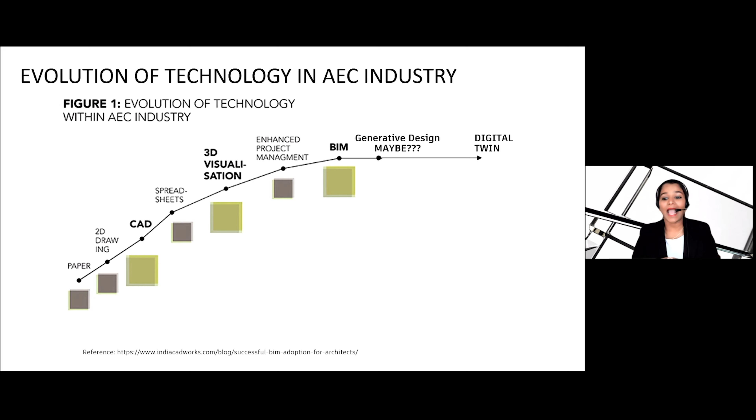This generative design for multifamily housing is a humble effort put together with our industrial knowledge and coding knowledge with a lot of enthusiasm. The objective of today's presentation is to introduce generative design in the multifamily field. There are a few projects done in this realm already, but either those are inaccessible or made into a software itself. This makes it difficult either for purchasing, mastering, or even knowing about it. Having said that, our objective for today's presentation is to identify the workflow to produce multifamily design options, implement similar automation processes to minimize design downtime, discover innovative design solutions for custom site conditions.

The goals for today are to explore design options for custom site, building, and units, to understand how generative technology is used in multifamily design, and to understand the pros and cons of using generative design itself.

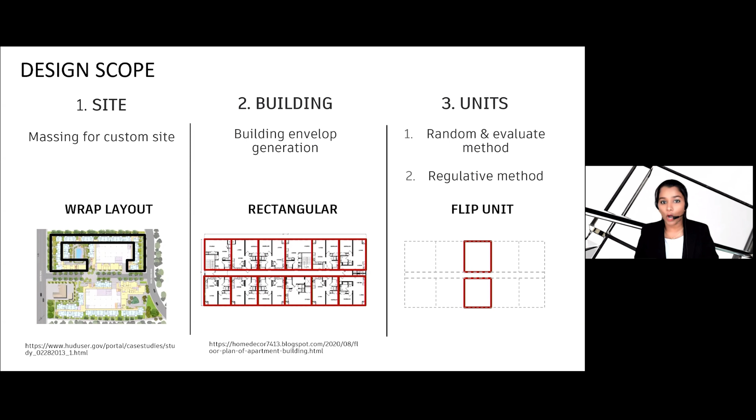Firstly, the design scope and the basics of generative design. We are going to see the idea behind generating options for custom sites, then moving on to the building envelope, and finally to the units. Units being the small yet major factor of multifamily, we are proposing two ideas of how units can be generated: random method and regulative method. There are obviously many types of construction, but the scope of this project is limited to a wrap layout, rectangular building, and a flip unit. The project can be expanded or customized to podium, slab, walk-up, and tower construction.

Primarily, the basics of generative design. Generative design is like a mathematical formula where you will have an input, formula, and output, except we'll have n number of outputs for all possible iterations. Generative design also has a way of filtering it, where thousands of options are proportionately reduced to 10s and 20s as per our requirement, after which the designer will be able to choose the best ones.

Here, stage one is the input stage. The initial idea will be given as an input, which can either be from Revit or it can be manual, or in some cases it can be both. The second stage is going to be the programming stage. The design restrictions are formulated in Dynamo in the form of algorithms and codes.

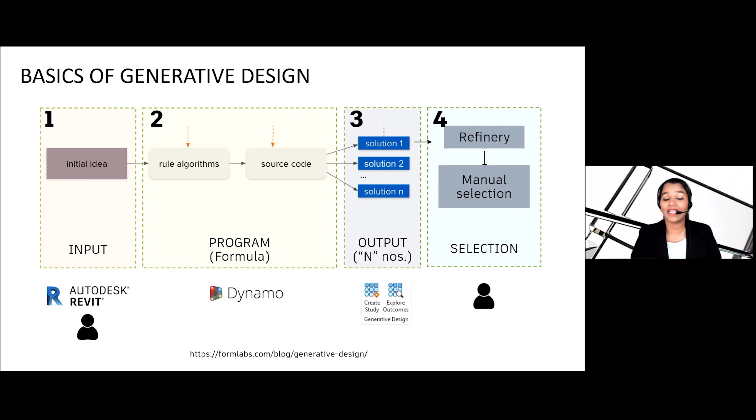Stage three is going to be the output stage. Here, n number of solutions are formed using generative design, where it can be filtered as well. Stage four is going to be the selection process. However many options the generative design can generate, the manual selection of design is definitely required by the designer.

Moving on to site solution. So we are doing an extrude and evaluate method. The design scope of this site is limited to wrap layout. The wrap is typically seen in urban areas where the site is either small or more expensive. This type is characterized by buildings being arranged along the property line, like it's being fenced by buildings, sometimes divided by walkways, roads, or breezeways. It usually wraps the parking structure or an open area like a courtyard.

Site generation is done based on a series of setbacks and extrusions. Then roads are allocated, followed by splitting the building based on custom requirements. Finally, the efficient and feasible output is chosen.

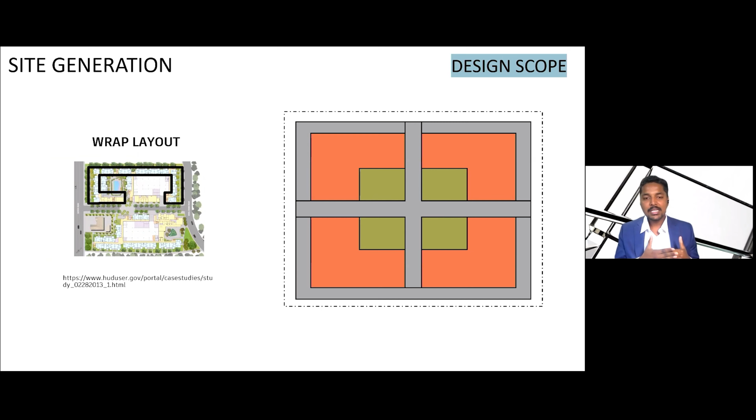These are the stages of how the graph is generated. Firstly, the input that the user provides. Second will be the program in the form of algorithm and code using the user inputs. Following is the geometry outputs generated out of the algorithm, then options in generative design, and finally the selection of the best solution.

So this is a visual representation of the stages of site generation. The first stage is input. Input in this case will be both Revit and manual input. The site property line is input in the form of a line drawing, which is from Revit. Then according to the city or county rules, the offset of walkways, landscape, setback, road, building width, and height are given as input.

Stage 2A is the offset. Based on the input, we can see a set of offsets are generated, which also includes the building width. Stage 2B would be the custom split. The building footprint that's generated is split. Here, for the sake of this project alone, a random method is used to create the split. Like I said, it can be customized according to county, city, and also the designer's need.

In the next stage, 2C, the split is incorporated with the building footprint, forming the required number of buildings. Then in stage 3, the buildings formed are given heights based on the supplied height input. At the fourth stage, n number of options are generated when the program is fed into the generative design software.

This is the actual graph in Dynamo. I mean to say, this is how we coded it. I've blown up the site inputs and the random split parameter to have an idea of what is happening within our script. Here the inputs are site property line, site setback, internal road width, number of roads, and building width. On the bottom left is the custom split parameter, which can be customized to the user's need as mentioned before. In this case, we have given random inputs.

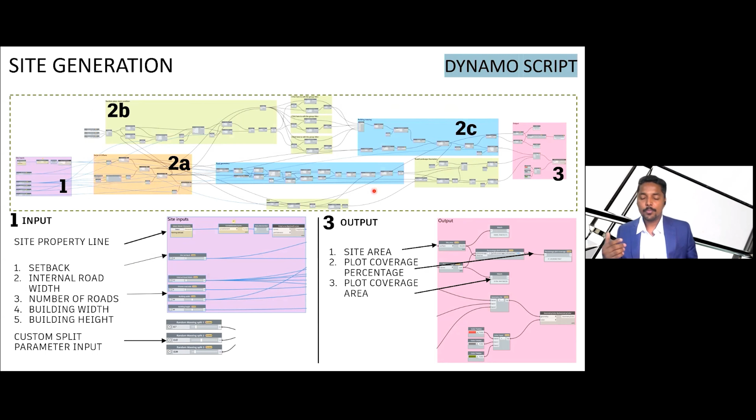The output of this graph along with the site massing will generate site area and plot coverage percentage, which is shown on the bottom right graph. Comparing the blown up graph and also the overall graph, we could clearly see that the script starts with the inputs that the user will be providing. Following that will be our script, and towards the end are the output nodes.

This graph over here shows the actual interface of the generative design. Over here towards the left shows n number of site options that have been generated from the Dynamo script that we showed before. If we move down this list, we have n number of options listed. The right side highlights one of the generated options along with the plot coverage, percentage plot coverage, site area, and also the split condition.

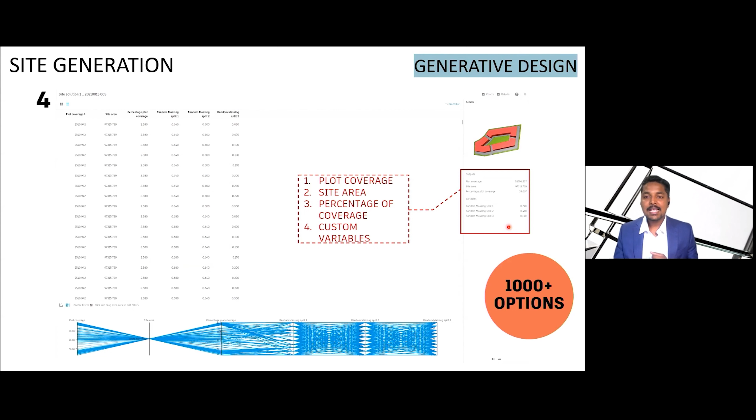The 1000 plus site options generated in this case are filtered based on the percentage of plot coverage. Here we have 100 plus options with just 35% of plot coverage. We can still move on and keep filtering the graph to fewer options to choose the best out of it.

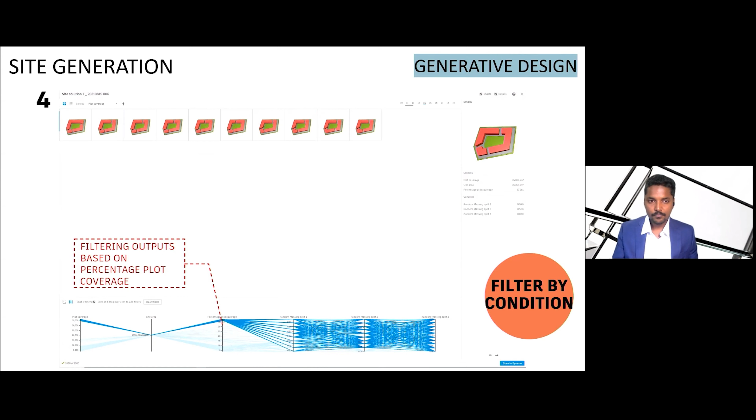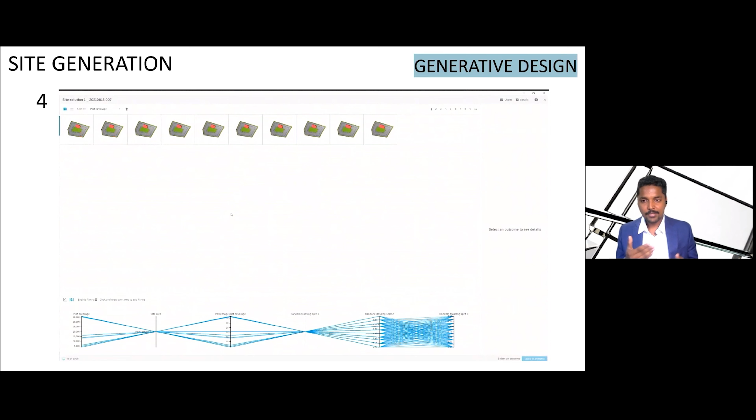Here, the first window is the input screen, after which the generative design software is producing 1000 plus options as per our requirements, which we can visualize on the bottom blue graph that's being updated as we look at it. We can also see on the top right where the numbers are increasing. That's the pages. Generative design is visually showing us 10 options in each page. We'll get to see it finish for a second.

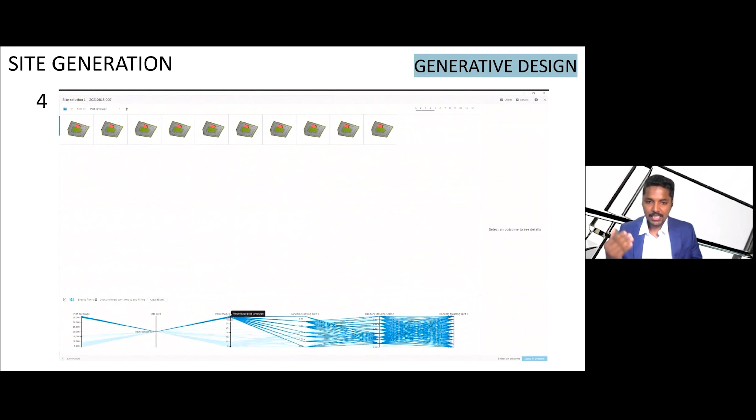Okay, I'm now filtering the options based on site area and plot coverage. This filtering will yield a handful of options from 1000 options. From here, the designer can choose according to the requirements. Now that the site mass is generated, this will form the basis for the building generation and unit generation.

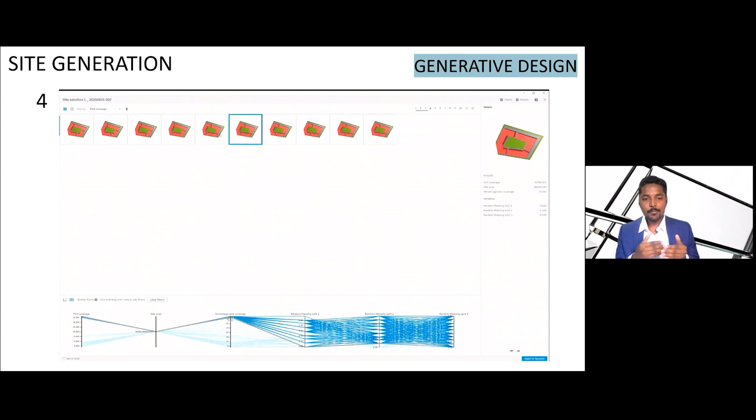Over to Ramya. The next part of this presentation is going to be the building generation. Now that we have achieved site output, the masses after the split can be used to generate the building itself. Building generation is going to be simple. Here we input the shape, say rectangular, L-shaped, or any custom shape. To remind what we discussed earlier, the building design scope is limited to a rectangular building. There's going to be a hallway. Along the hallway, on either side of the corridor, units and stairwells will be arranged.

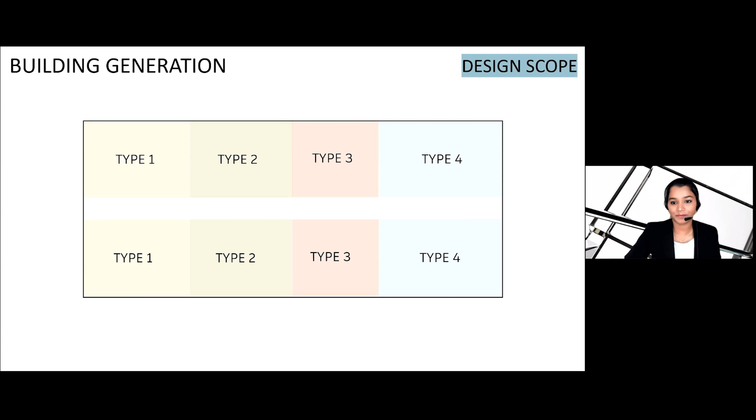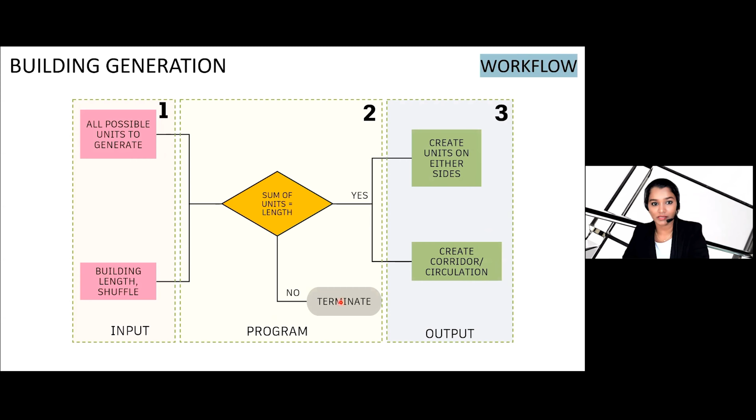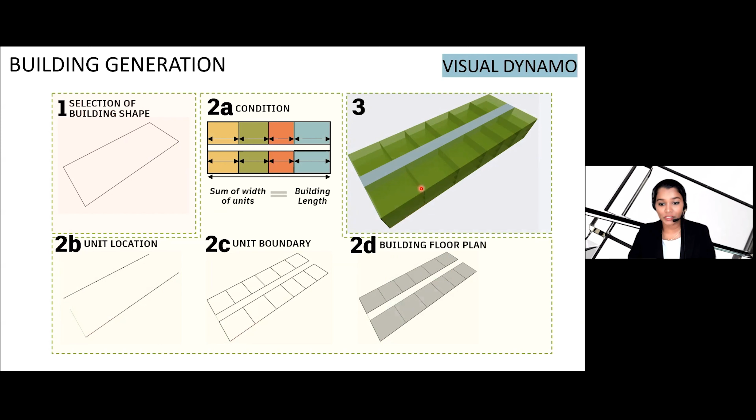Stage 4 produces the unit boundaries within the building boundary according to the number of unit requirements that we supply. In stage 5, Dynamo creates a surface for the unit floor plan. Then this is extruded and multiplied to the required number of floors vertically. Building generation in Dynamo will look like this. Here I have blown up the inputs for us to take a look at and understand what's happening in Dynamo.

The inputs here are all unit sizes. We are considering 1 and 2 bedroom units for this project. The range of unit widths will be from 24 to 38 in increments of 2, like 24, 26, 28, 30, up to 38. Other inputs are the number of units required in the corridor, building length and width. The graph is then fed into the generative design software to create the most optimized option.

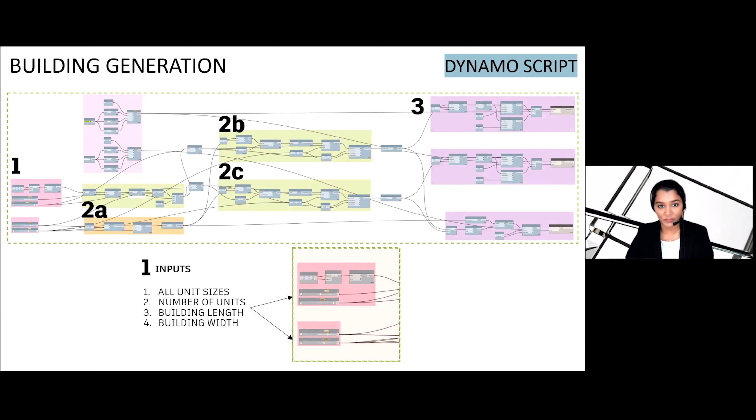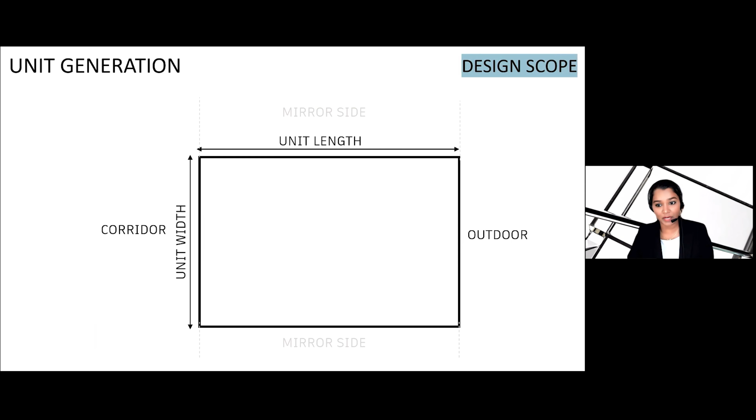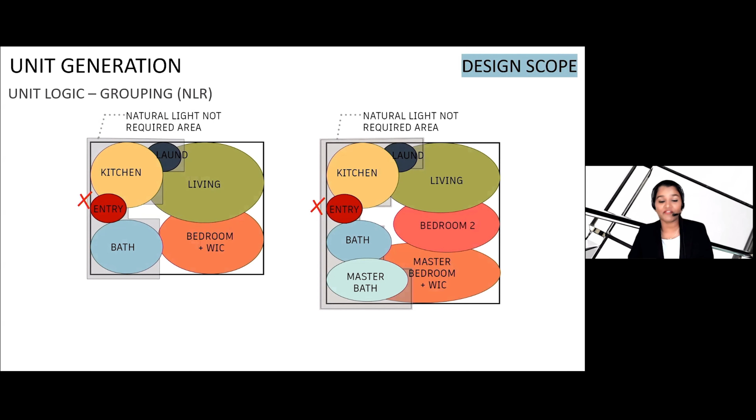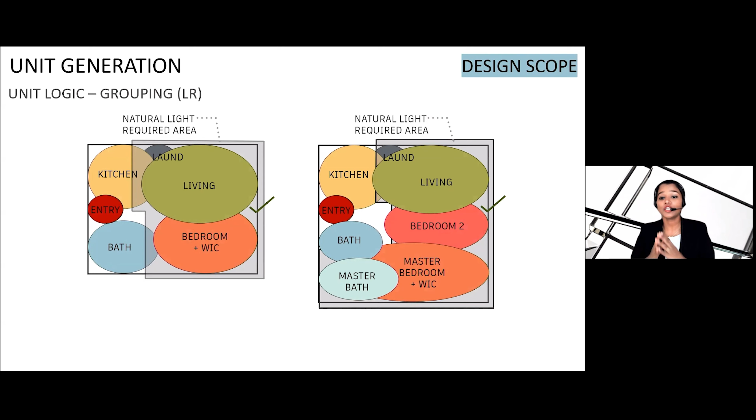The logic behind placing rooms within the units follows a grouping pattern: the natural light not required area and the natural light required area. These are the two grouping categories. Rooms like entry, bath, kitchen, laundry, pantry, coat closet, linen, and walk-in closet can be placed on the walls which do not have natural ventilation. But rooms like living and bedroom, called the habitable rooms, by law require natural ventilation. The grouping helps us zone these rooms and hence narrow the design much more.

The first method is the random and evaluate method. This method will generate rectangles within the boundary, and the locations of the rectangles are evaluated with each other. They are given design scores based on the evaluation.

So like you see, the inputs in this case are going to be the length and width of all the rooms and the unit width itself. If the inputs satisfy the condition, then rectangles are created on the non-light required zone and light required zone. The rectangles thus created are evaluated against each other in Dynamo itself.

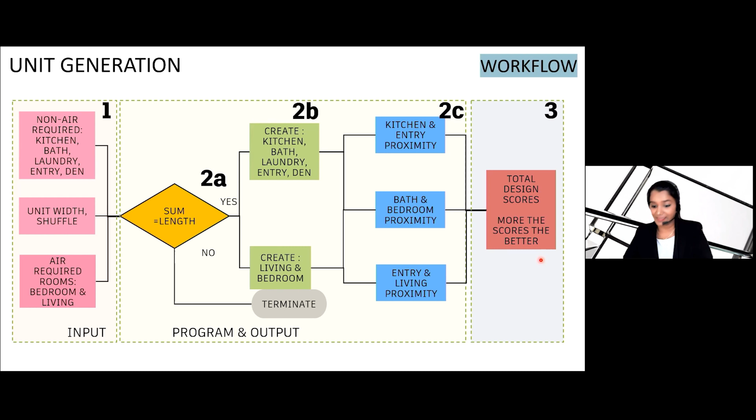The evaluations are assigned a score based on the output. The sum of these scores is called the design score, which is an output itself. The higher the design score, the better the design is. Here we are discussing the conditions that the inputs must satisfy in order to form rooms within the unit.

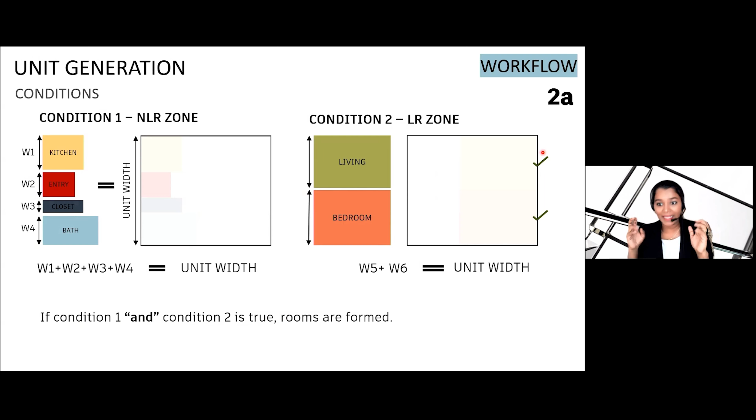Condition 1 is for the non-light required zone. Here, the sum of the width of the rooms should be equal to the unit width. Similarly, condition 2 is for light required rooms. Here, the sum of the width of the light required rooms should be equal to the unit width. All the rooms will be produced only if both conditions are satisfied, otherwise it will be terminated.

This is how the unit generation will visually look. Inputs are given in the first stage. These inputs are the dimensions of the rooms and unit width. Like we discussed earlier, it must satisfy condition 1 and condition 2 in order to create the unit boundary. The edges of the unit boundary are then selected and the origin points for the rooms are created.

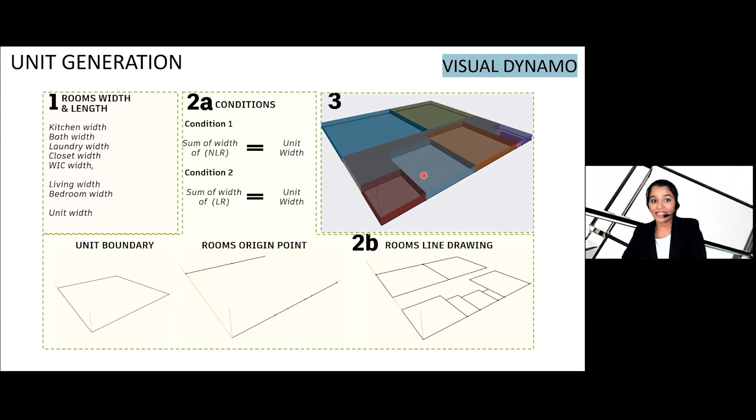With the origin points, rectangles are created within the unit boundary denoting their respective rooms. And then it is extruded to form the whole unit itself. The unit geometry creation will look like this in Dynamo. I mean to say, this is how we coded it. I have zoomed in on the input for the unit generation to understand what is happening there.

Like we see, there's a slider for the width of the kitchen, bath, entry. This also gives a way to toggle between rooms. For example, the laundry room can be toggled. If you want a laundry room, you can have a laundry room, or else you can just avoid it.

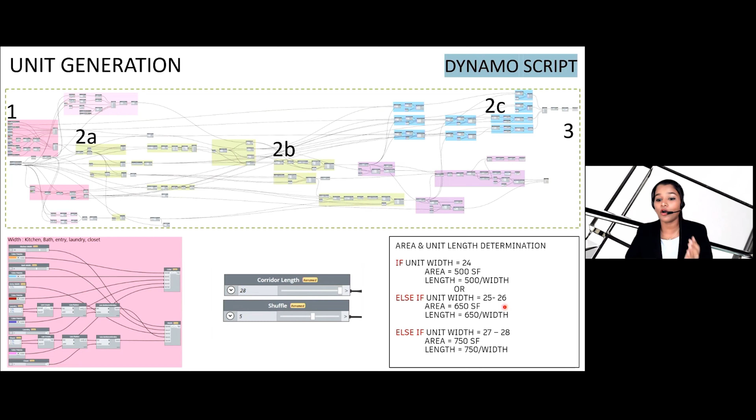We also have an extra condition here where the unit width will determine the area and length of the whole unit. For example, if the unit width is 24, then the area of one bedroom will be 500 square feet. Similarly, if the unit width is between 25 to 26, then the area of these units will only fall under the 650 square foot range.

The interface that you are seeing here is the generative design software. Here the graph, random and evaluate, is fed and 26 foot is given as the unit input. Towards the left corner, one can see 1280 options generated. Generative design uses the cross product method here, which iterates every single input against each other, producing 1000 plus options.

In this animation, one can see all the options are arranged according to design score. On the right, one can see one of the 1280 options generated along with its input. The graph below indicates all the options in the form of blue lines. You can see the animation on the right where it shows all the options and it looks nice. Some cases have laundry, the other cases do not have laundry based on the toggles.

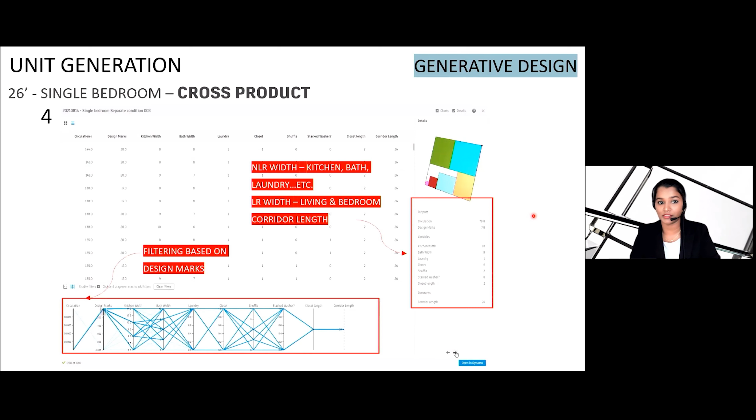Here, this example shows the unit generated for 28 foot unit width. Unlike the previous method, here generative design uses the optimize method to evaluate the graph. Here, the software optimizes by maximizing the design score, hence producing only 48 options.

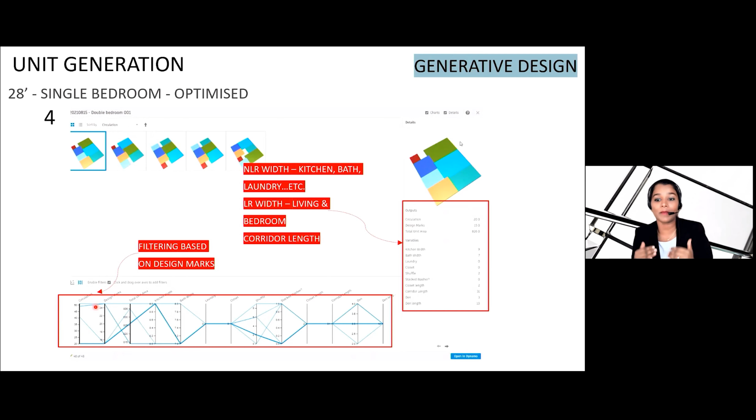You can see in the bottom graph that I have further filtered the 48 to show only 5 options based on the design score. I have specified the design score should be above 24. Here, the designer's work will be much more reduced, to choose 1 or 2 options from this.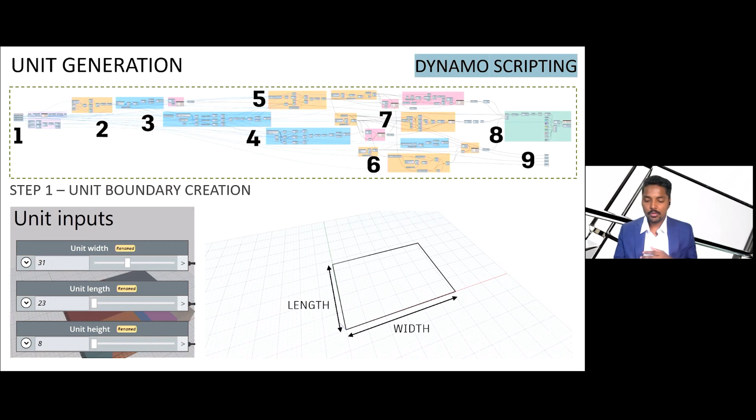In step 2, points are created using cross product of dots located on the unit boundary. Moving on, the first row of points are isolated. These are the points that form the corridor side width of the unit.

The next step, step 4, as I said, this is going to be regulative method. Here, placement of my first room, that is my entry, will define all the other units to follow. For example, the entry, obviously the access of the whole unit has to be placed on the corridor side. This does not require light, so it's being grouped under non-light required room. Entry is given three different locations: start of the unit, midpoint of the unit, and at the end.

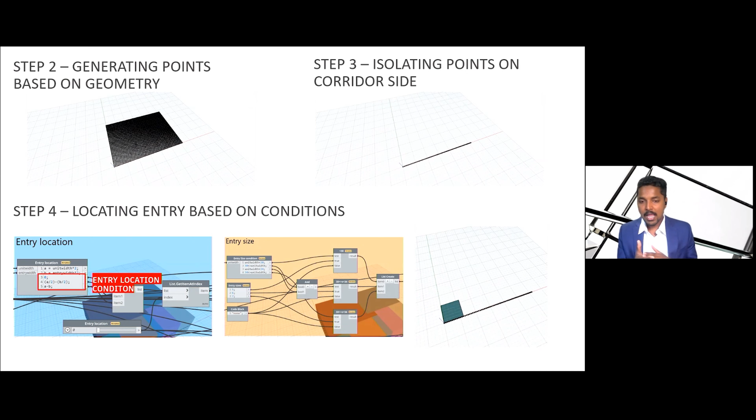Now, a rectangle denoting the entry is created based on the supplied width, which you can see on the green rectangle. We have also brought in few conditions for the entry size. Say, if the width of the unit is less than 30 feet, the entry size will be a 5 cross 5 feet rectangle, and the entry size will increase along with the increase in unit width.

Step 5. Now, based on the entry location, kitchen and utility area are created. If we look at the three images on the top left indicating the different location of the entry placement, we could observe that the kitchen and the utilitarian spaces follow it. The rectangle in the green is the entry, the orange is the kitchen, and the magenta is the utilitarian space. If the entry is on the start, the kitchen will follow the entry and the utilitarian space will follow the kitchen. Similar condition goes for the other entry locations.

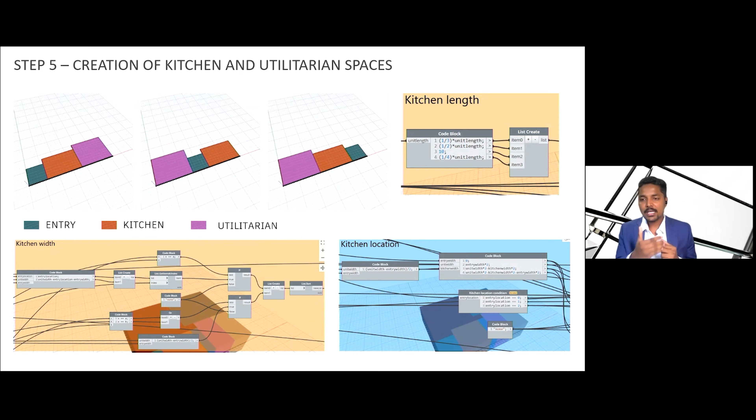In step 6, further the spaces are subdivided to accommodate the storage for kitchen area together, while the random method that Ramya explained will have pantry as a separate room itself. Over here, bath and walk-in closet are grouped together as utilitarian spaces, which are subdivided respectively.

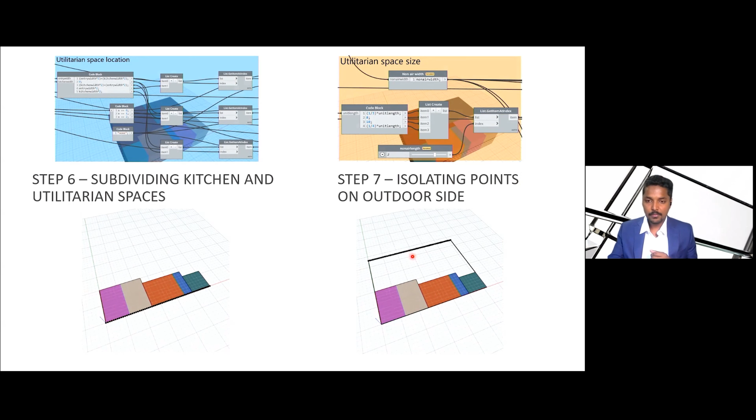The next step, step 7, similar to what we have done before for the entry placement, we also have a condition for the bedroom placement to be aligned towards the ventilated side. Thus, the point on the outdoor side of the unit is isolated for locating the bedroom placement. Moving on, we are locating the bedroom on the points that are generated in the previous step. The bedroom is placed on either side, achieving different unit layouts.

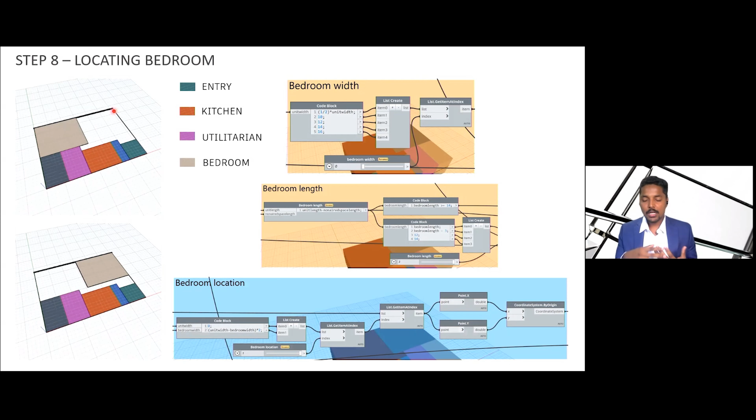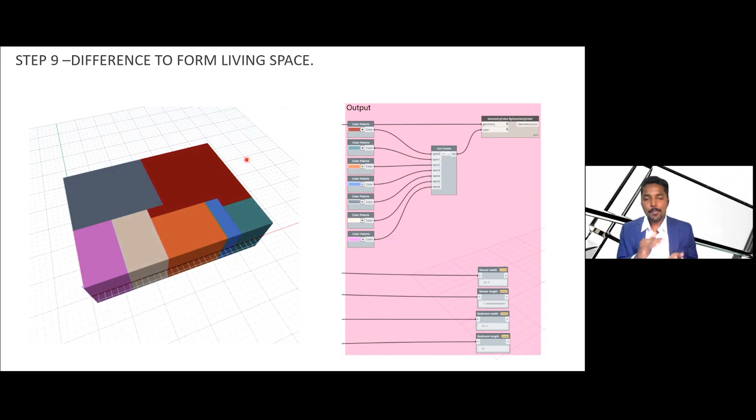Then the surfaces formed are subtracted from the overall unit surface. This difference will yield us the living space that you can see in red. Thickening of these surfaces will provide us with the unit massing. The spaces are color coded accordingly for visual perception.

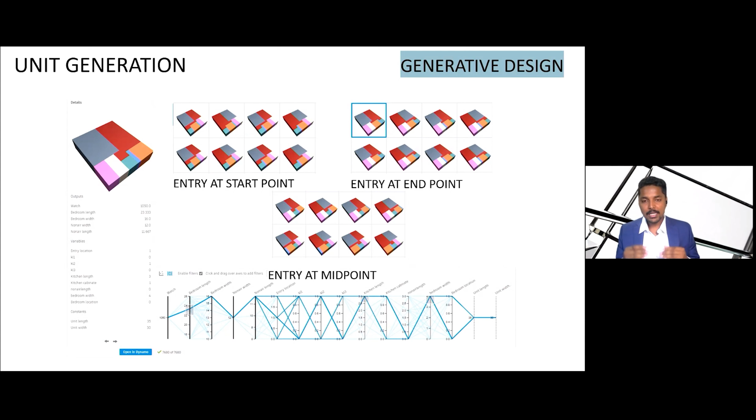Here you can see three conditions where the entry is at starting point, end point, and midpoint. The options generated are based on n number of conditions and inputs supplied to it that we have seen so far. And the graph on the bottom has helped us in achieving these outputs by manipulating, thus filtering the best option for the user.

We are almost heading towards a conclusion, and I also thank you all for your patience. This would be our inference through our work on this topic. First, thorough understanding of design scope is necessary with accurate design goals. Second, generative design can be used to generate n number of options. Third, one can customize the graph to an ideal situation and it can be followed perfectly.

The fourth one, multifamily graph can be optimized for specific or multiple situations or conditions. For example, it can have a specific graph option for wrap construction or podium construction. This purely depends on the requirement of the user. The next, design options can be quantified mathematically, helping to choose the appropriate one.

Sixth, the time consumed by an experienced designer team of 4 to design a 100 units multifamily option would be around 2 to 3 weeks, but generative design would take less than half a day, including the manual selection process. As it is using the Dynamo interface, modeling in Revit will be quick as we can use the outputs that are generated.

We'd like to conclude the presentation by saying generative design can be used in multifamily to produce efficient design options with further detailing of the graph. Also, it can be used to produce innovative and quantified design.